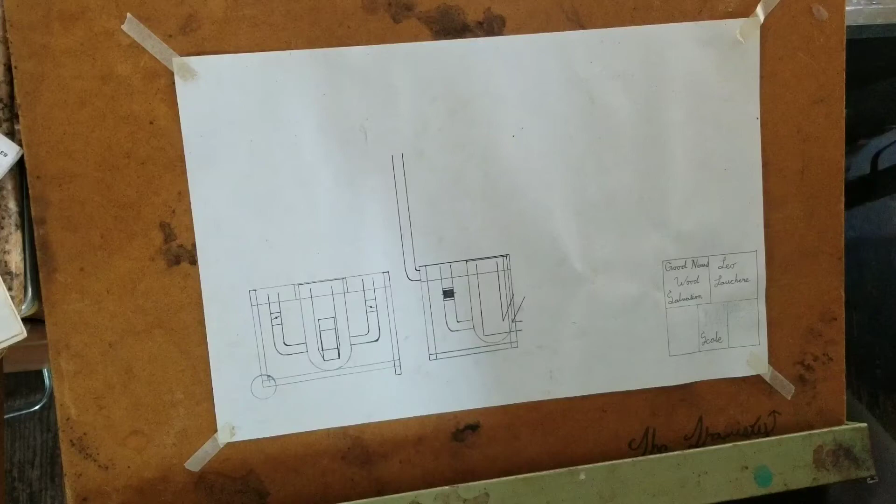Alright, I'll be able to share here.

Just got a little bit more refined drawings, and I wanted to walk through the idea of this rocket stove here. So it's a mobile system, trying to get control and adjustment abilities out of this stove system. So it would be kind of set up like a barbecue grill in a way, where it has a wheel on one end and you can wheel it around, and it would fit into this mobile trailer that we're figuring out.

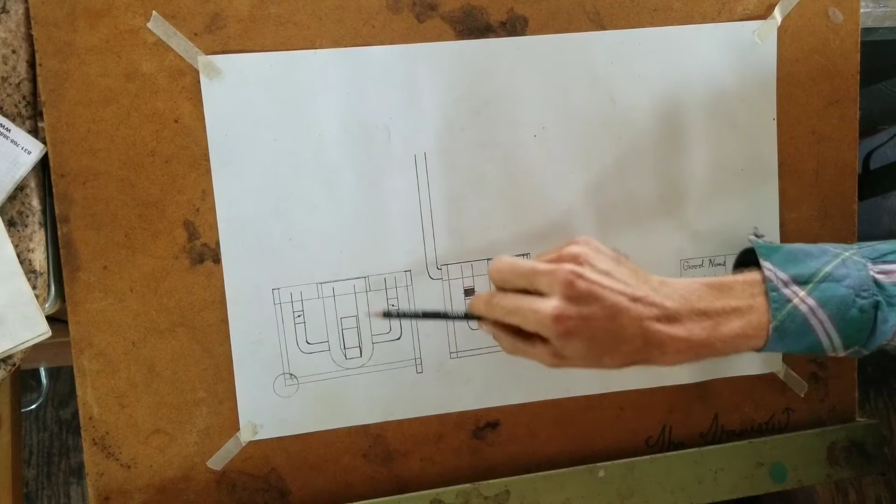Here's the combustion chamber from the front, from the side. I have this propane tank that I'm thinking of using, and we have kind of the classic rocket stove shape here, which I'm thinking of making out of something like maybe 3-inch box tubing or pipe. Not sure yet.

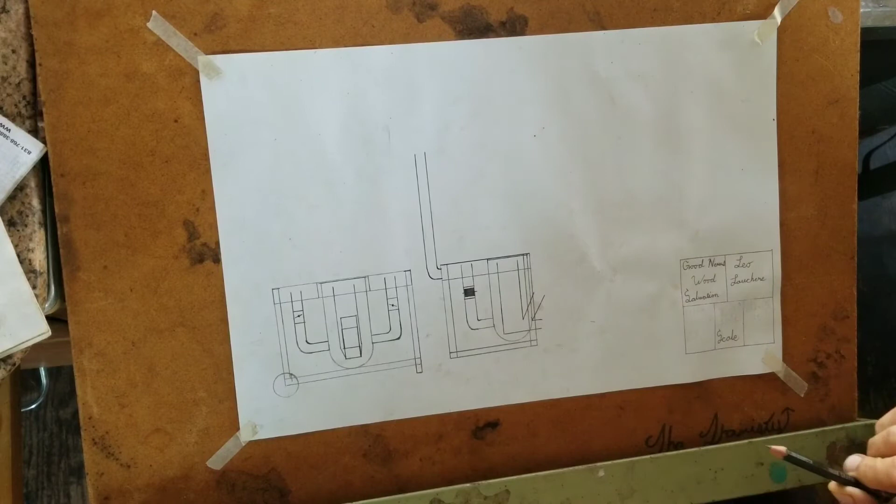So here's where the feedstock would come in, air. I'm thinking of putting some kind of doors on both of these with some kind of an air adjustment. And then figuring out what kind of little grate goes in here, how that works exactly, I'm not totally sure. Then combustion is taking place in this area, and we have this kind of riser tube. Could insulate this, could put another pipe on the outside with some perlite or whatnot between the two.

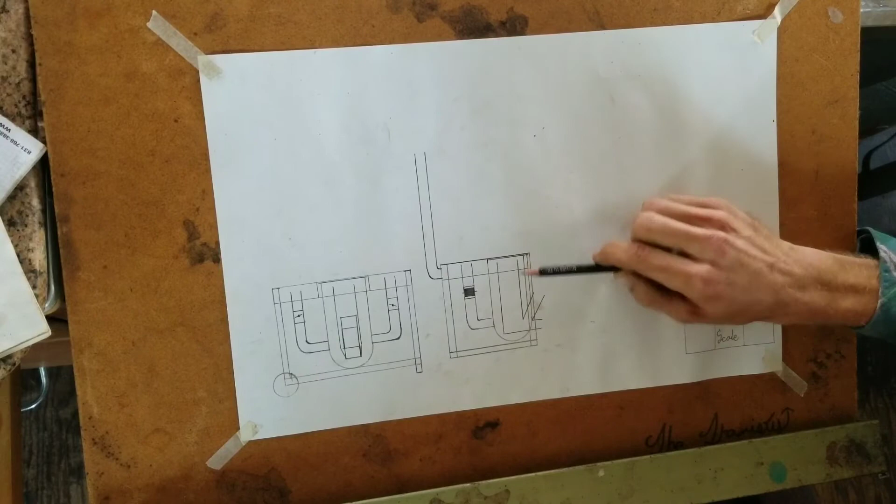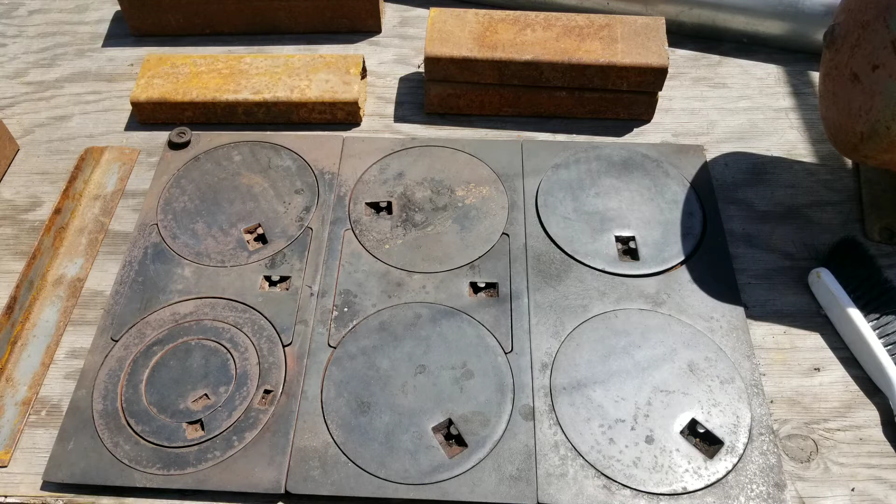Haven't decided. And then one question I have: the flames will be interfacing with the top. There will be these removable plates from an old wood stove. And at the top of the combustion chamber, as it goes into the secondary combustion outside zone in this larger tank, might I want to interface the top directly with that stove plate, or put a steel plate at the top of this?

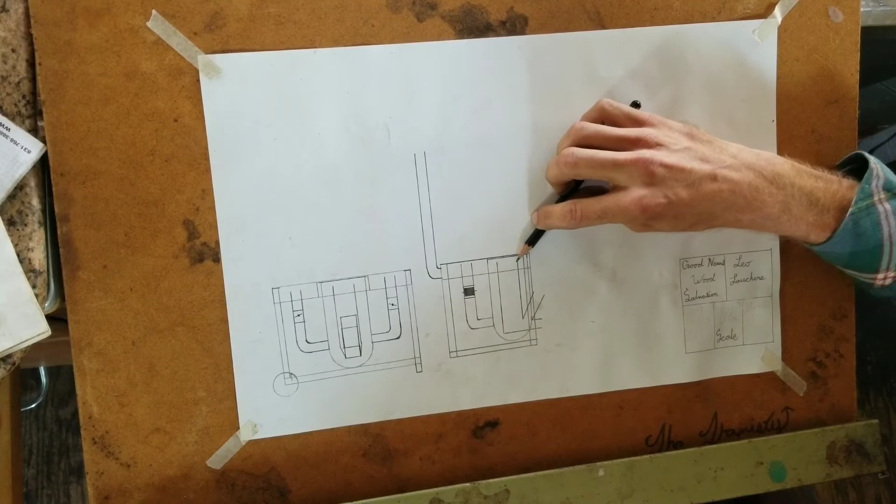I just don't totally trust the stove plate to not melt or warp or something under the heat that would be going on here. Of course, if there was a plate here and then that plate, I'm losing quite a bit of efficiency there. Anyway, that's a bit of a question mark.

So then, from this front view,

I'm doing something right now, hold on. Sign it.

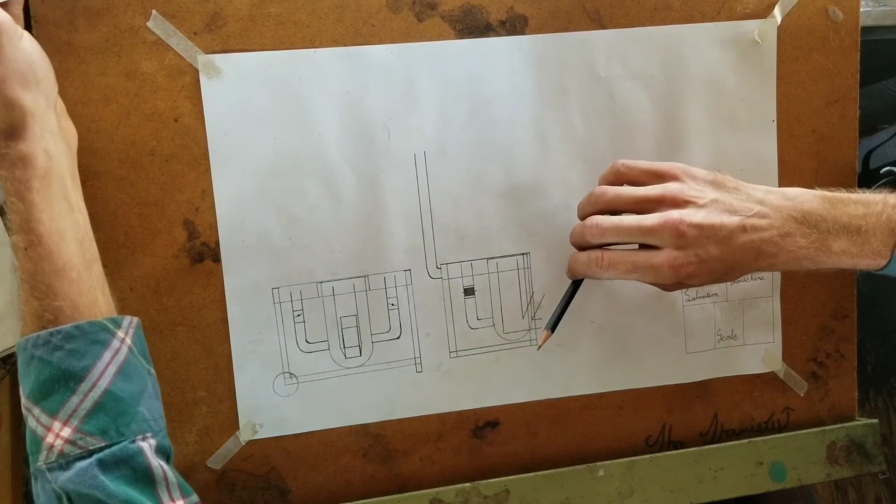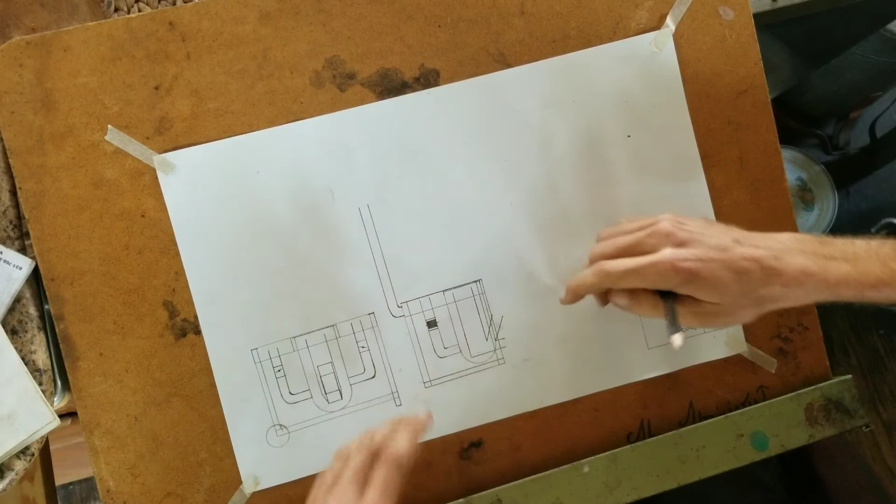So here we are from the front, and at the bottom of secondary combustion, if that's a fair enough term, going down, and it's coming out 3 ways. This is the idea. It's exhausting out and going up where it would interface with the cooking surface here and here and here.

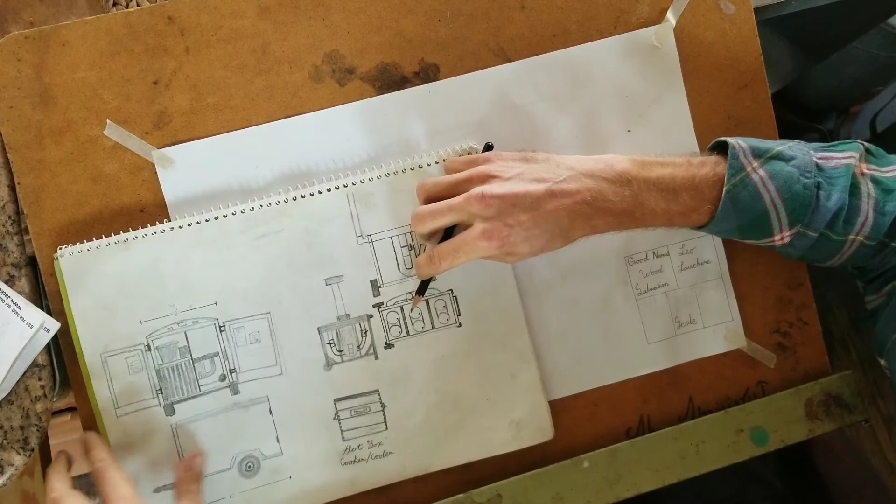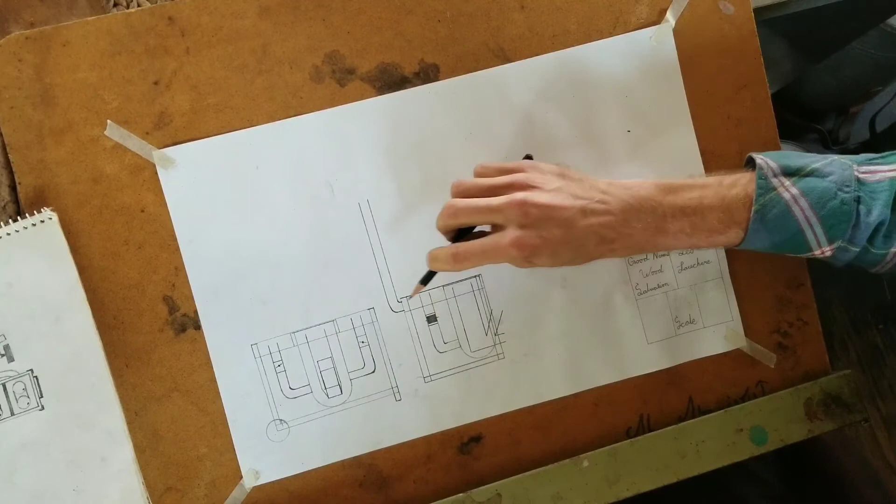Again, it's its first time being in these two chambers, and it's its second time. So the way it gets over there to this plate, this idea here is some kind of a baffle or a valve or something. Yeah, really a baffle. And then the flame that originally did its thing here and interfaced here, this would be the hottest burner, is interfacing now here, here, and here, and it would go this way,

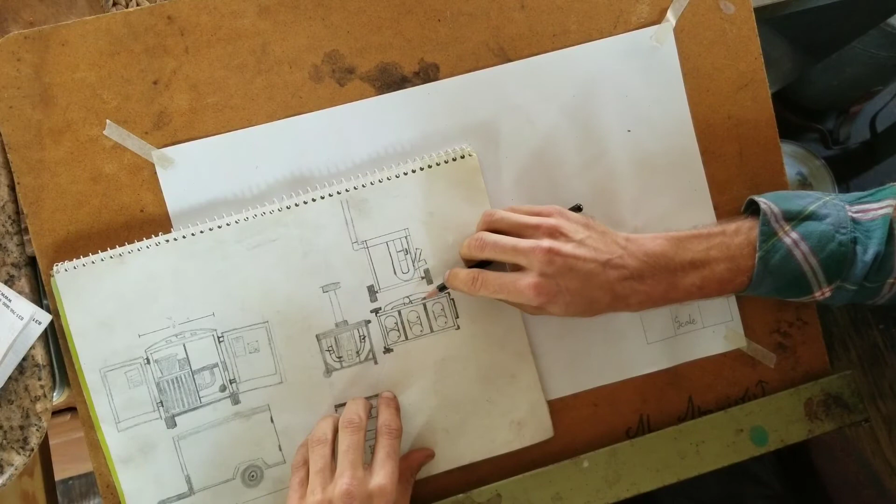and there would be a bit of a manifold on the back that's very simply conveyed here with a stovepipe to get it above people's heads, which they'd be about this tall or whatnot. Anyway, that's the idea.

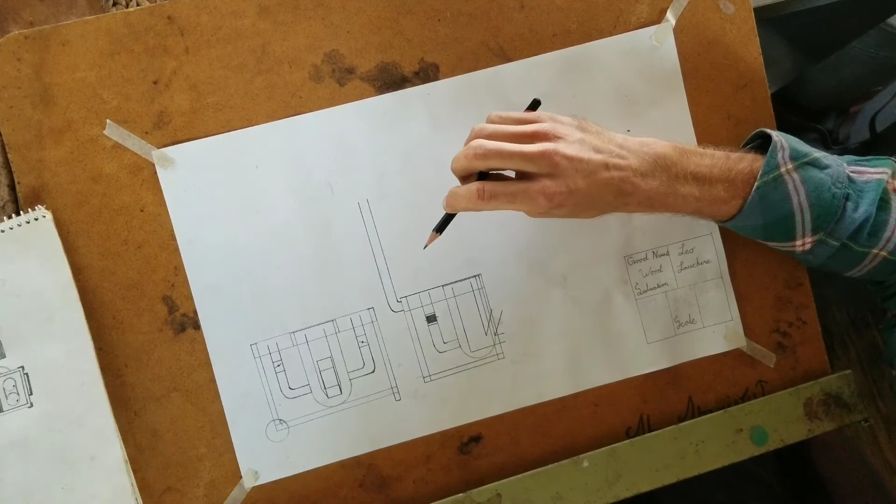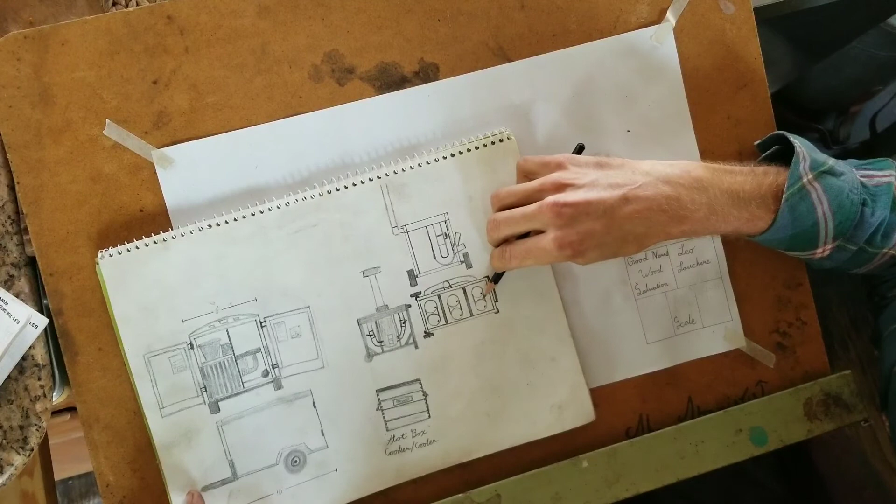Another part of this is us from the top, of course, here, and I have this plate, and this could be swapped out with just like a 1/4 inch or whatever steel plate, just a solid plate. Haven't decided yet. I really like these on our wood stove. The adjustability. I mean, you'd have a fire coming out here or a lot of heat. Don't think there would still be fire at that point, but a lot of heat coming, and you could interface it right with the bottom of a pot.

So you have 3 burners that are just going, really 4 that could be going, and then you have quite a bit less heat on these burners, and the whole sides would be adjustable.

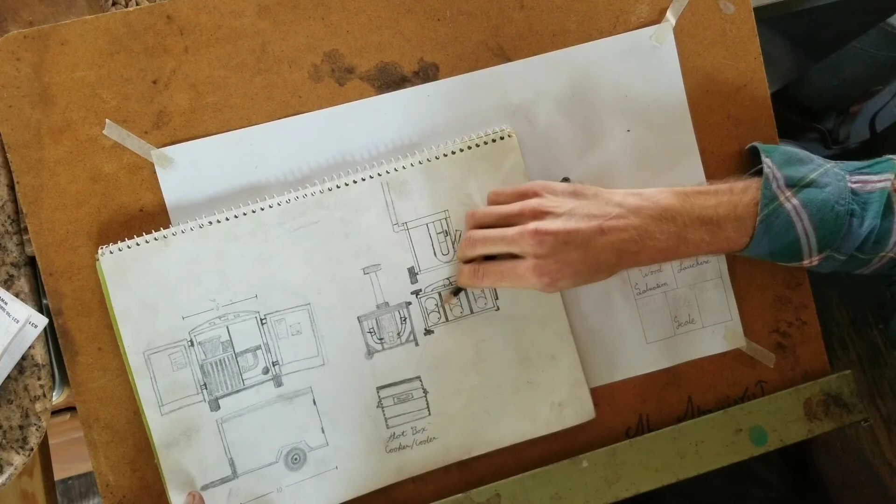Oh, one thing I haven't mentioned, Bear over there at All Power Labs was telling me about this 50 watt 12 volt fan, this little blower, and I'm thinking of adding it to the stovepipe with a Venturi kind of a situation. I don't want to mess around with having to cool the exhaust enough to put it right through the blower, and I would like some support in the starting process, especially to get this draft going.

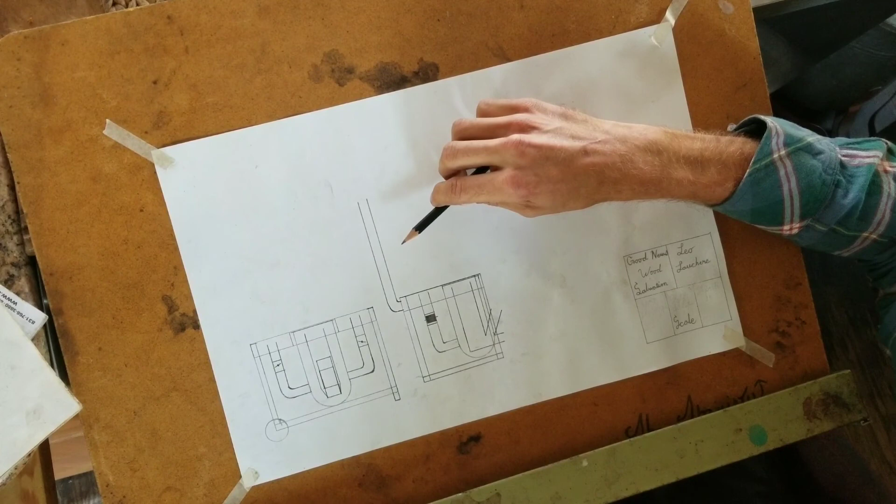I think that would just make it way easy, and then possibly to get the amount of heat out of this system that we may be calling for by running the fan during cooking. So those are some thoughts.